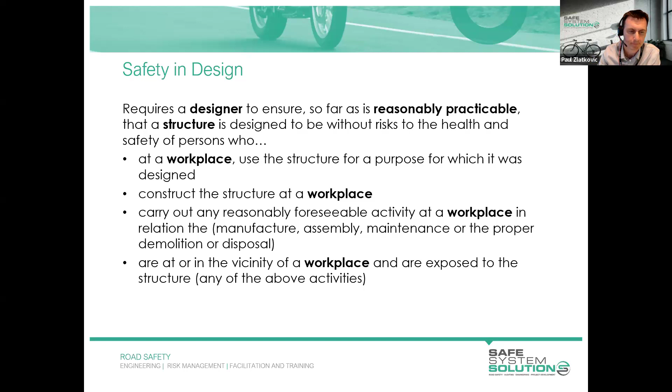Let's dive into a quiz. Now, I understand that safety in design may not be everyone's idea of an excitement-filled topic. So as I said earlier, there are prizes to be won, and our aim is to keep you thinking and involved throughout the session. We're going to run a series of polls, and ask you to contribute some answers in the chat as well. We're going to dive into the meaning of those terms: workplace, structure, designer, and reasonably practicable.

No, actually a workplace is a place where work is carried out for a business or undertaking, and includes any place a worker goes or is likely to be at work. So under the Work Health and Safety Act, a workplace covers many places beyond a traditional view of a workplace.

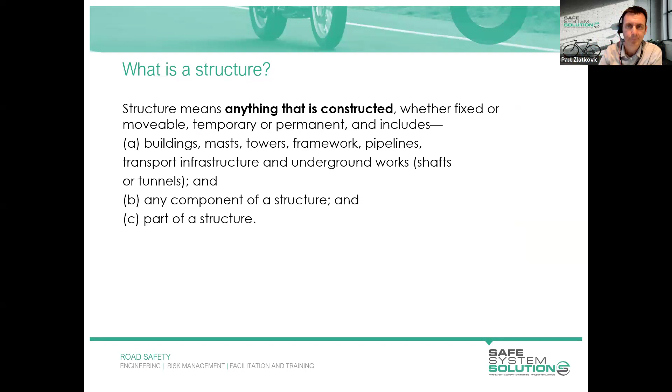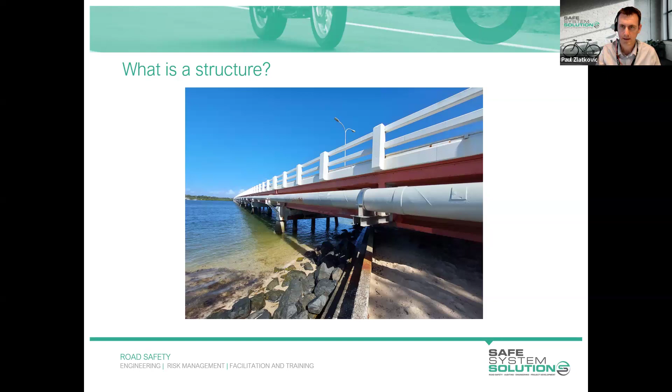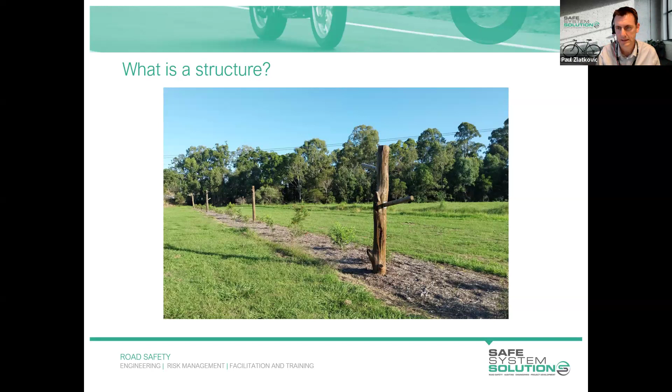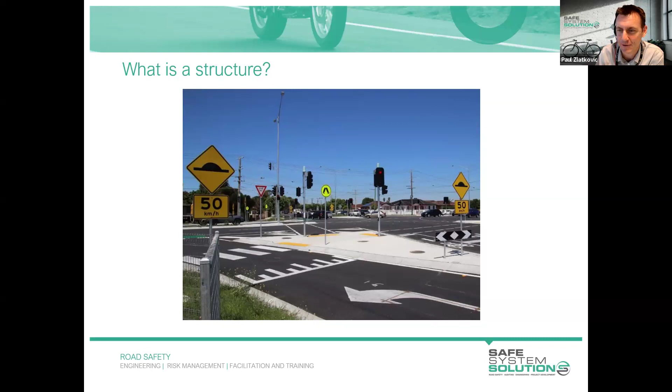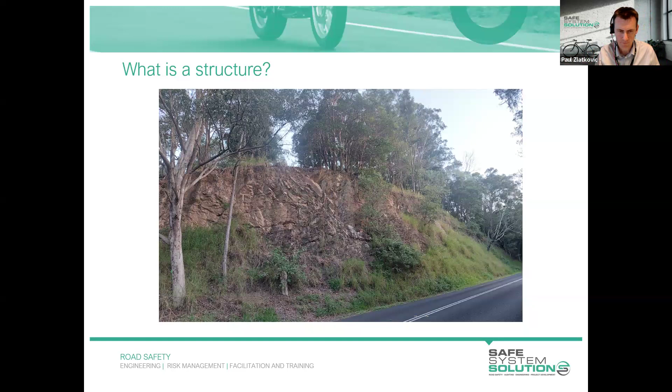Wonderful, all right, so we'll put the polls away for a while. We've got a few more coming though. Oh, actually, sorry, what am I talking about? Got carried away there, nearly forgot one, Paul. Yes, I've got lots of structures. Just ironing out the kinks, aren't we? I can't remember how many I put in, but I got carried away.

All right, I promise that this is the last one around structures. We're almost there.

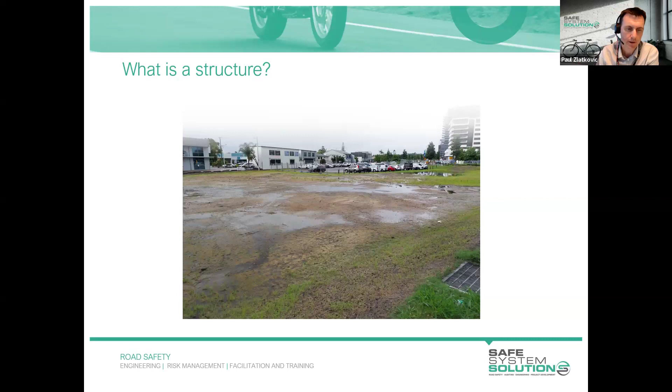Fantastic. Okay, all right, so we're moving on from structures. Now we're going to focus on designers.

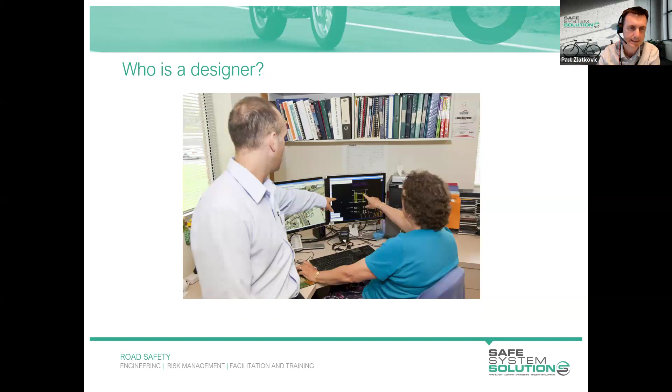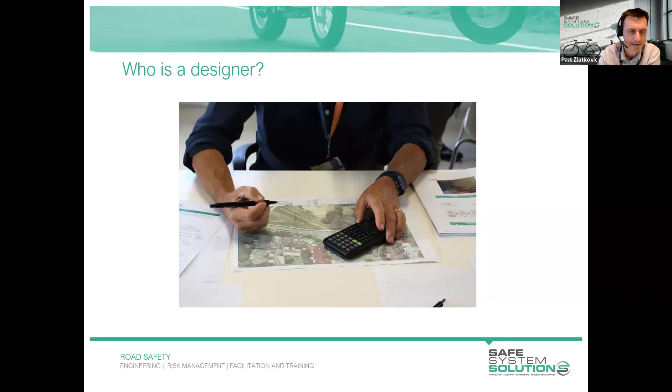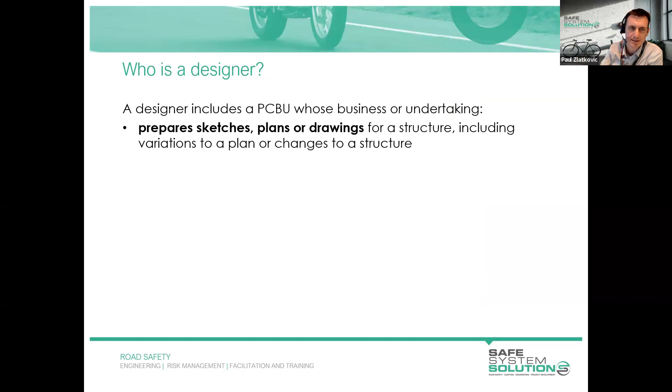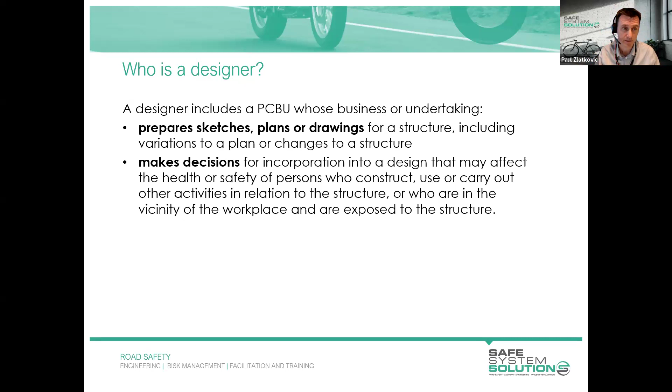So who is a designer? Is it just the people working in that photo there using AutoCAD or 12D? Are those the designers? Someone that uses a calculator perhaps and marks up plans, classic designer behaviour? Well, yes, those are designers, but no - the designer is anyone that includes anyone that prepares sketches or plans or drawings for a structure, including variations to a plan, and also includes people that make decisions for incorporation into a design that may affect the health and safety of persons who construct the structure, or work around the structure, or in the vicinity of the workplace. Those are also designers. So that's an important point there - it's not only what we all know designers are, preparing sketches and plans and drawings, but also those people that make decisions that can affect a design.

So I don't have a poll here, but I thought in the chat we could write the names of roles that you might think of that are at council that would fit that definition of a designer.

John's pretty quick there. So councillors, Brent - civil designer, spot on Brenton. AutoCAD draftsperson, managers, yeah Hans. Project manager, indeed. PRO - is that a project responsible officer, architect? Yep, that's it. I was just going to say that, yep. I think I've heard that before. Engineer, spot on Aaron. Site supervisor, yeah that's a good one. Graduate designer, yep, designer, yep - I'm sure graduates make decisions, that's for sure. Lighting engineer, senior designer, a master planner. Well done, yep Simon, spot on.

So all those are designers under the definition, or could be designers under the definition in the Work Health and Safety Act. So yeah, John threw up councillors there, and I'm not sure of the processes you have at council, but I do suspect that councils can influence and make decisions around designs. So in that context, they would be a designer under the Work Health and Safety Act.

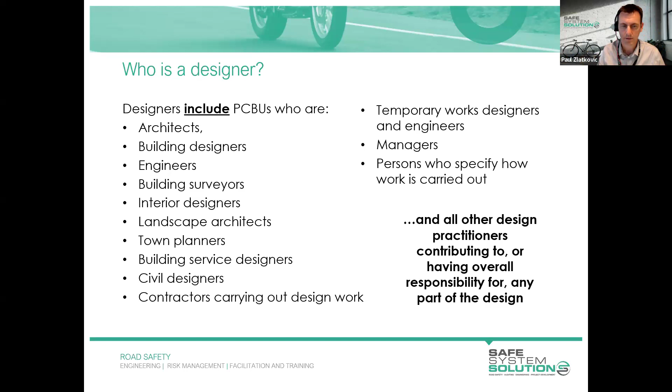Also, I'll just jump onto the next slide. There's a few key points to take away from this one. So anyone that makes variations to a plan or changes to a structure is a designer. So if a design is prepared and it goes out to the field and there are some changes made in the field, and the original designer hasn't been consulted with, then the person that's making that change or variation to a structure then becomes a designer.

So that's quite important to note. Anyone that specifies how work is carried out is also a designer. So you may not be involved in plan preparation or making decisions around the design itself, but if you prepare a specification, a project specific specification about how some work is going to be carried out, well, you're a designer under the Work Health and Safety Act. And contractors also carrying out design work are designers. So it doesn't matter what you call yourself - you might call yourself a contractor, but if you are doing design work, then you are also under the Work Health and Safety Act.

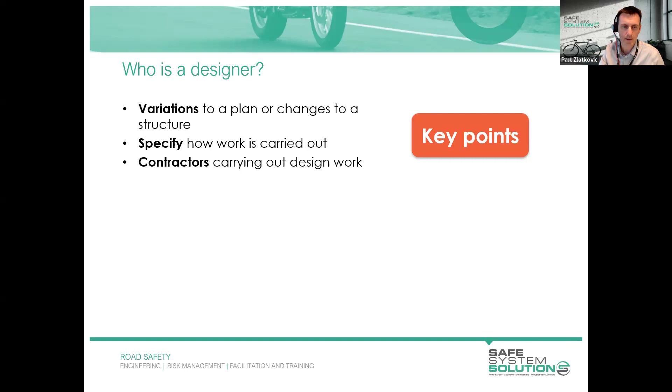Okay, so we've covered designer, we covered structure, we covered workplace. So the last term I want to delve into is asking ourselves what is reasonably practical. Remember that safety in design requires a designer to ensure, so far as is reasonably practical, that a structure is designed to be without risk to health and safety.

So you can see the guy on the screen now. Is that a reasonably practical way to protect yourself from hazards? If it works - maybe if you're posting yourself somewhere, that could be the go.

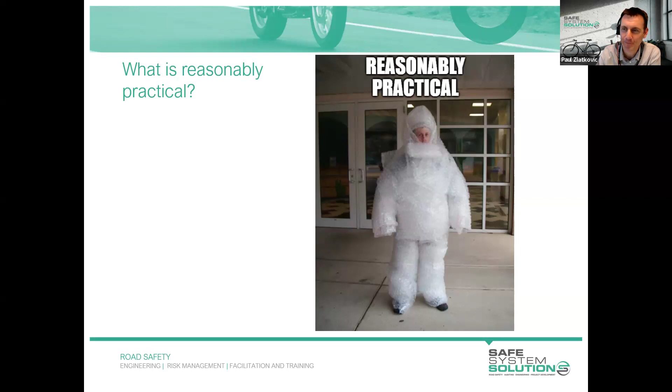I might just jump in there. We've got a question that's come in. Paul, is a member of the public a designer if they put a sign or similar in the corridor? Great question, Andrew. I think we'll shoot Andrew a prize. What do you think?

I would say no, because unless they've been asked to put the sign there, they haven't been authorized as a designer.

Yeah, I'd agree. I assume that there's some authorization required to throw things into a road corridor. A vandal - yeah, that could be a description, Jamie. Prize for Jamie for making us laugh. I'm not sure of the exact process, but I'm assuming, Marco, that no one can just go out there and throw a sign into a road corridor without having some sort of approval or authorization. It does happen, but I think there's an approval process to put signs, because it depends if it's one of those variable message signs, and the amount of light and stuff like that.

Is it constructed, I guess, is the other question. Yes, I think something that has to be fixed to the ground or hammered in, maybe a stake, is something that is constructed.

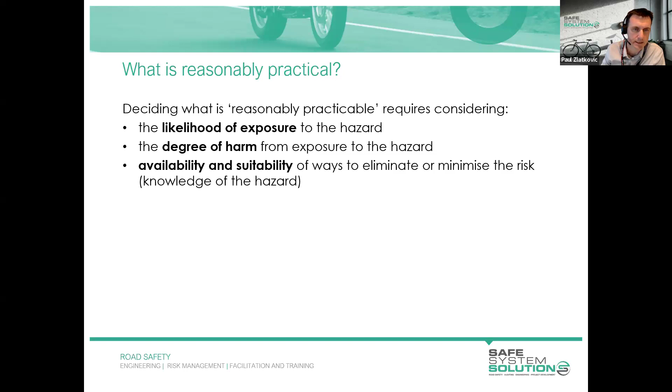The next one is availability and suitability of ways to eliminate or minimise the risk - is there a means to do that, I guess is the question. And the cost associated with eliminating or minimising the risk, including whether the cost is grossly disproportionate to the risk. That term, grossly disproportionate, will have a different meaning for everyone, so there's certainly some subjectivity around what is reasonably practical.

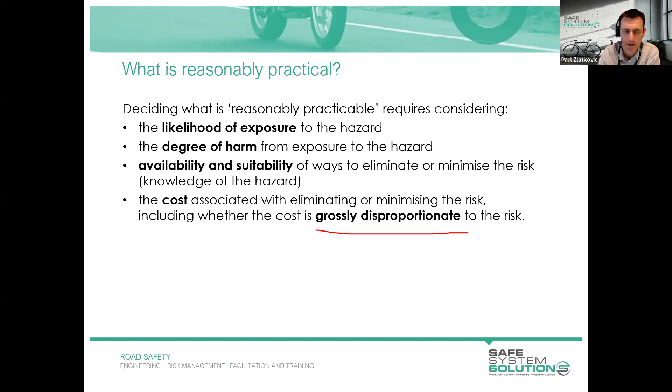So we're going to move into another exercise just to get us thinking about what is reasonably practical. And surprise, surprise, there's going to be some polls involved, so we'll get you thinking - caps on.

So in this exercise I want you to think about a hazard. The hazard is working at a height, and the reason you're at height is that you're replacing a luminaire on one of those light poles in the image, and the risk is then falling from a height whilst you're replacing the luminaire. So we're going to think about what are some reasonably practical ways to eliminate this risk.

So Marissa, you fired up the poll there - some options for you. I want you to respond with what you think is reasonably practical to eliminate the risk. The first one is just don't worry about road lighting, we don't need it, that will eliminate the risk. Use hinge poles that can be maintained from ground level. Specify a long life luminaire that costs a little more. Design a council drone to go and just change luminaires everywhere.

There's no drone department at council, is there, Marco? Our surveyors have a drone, but for survey purposes only - I don't think it can change the lights at the moment. Not yet, okay, because if you did that might change the answer to that question. So we've got, we're almost there on responses.

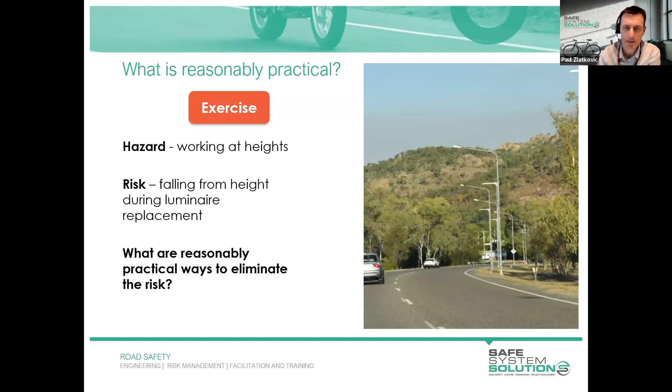Design a drone to change the luminaire. So there's perhaps a few handy drone pilots among you that thought that could be reasonably practical. Based on my knowledge, probably not at the moment, but the way things are going, that could change. Well done, I think we're all in broad agreement there. So we'll jump on to the next one.

Thanks Paul. We also had a comment that you could install the lights further away from the road corridors so they're safer and easier to access without work crews being on or close to the live road. Yeah, spot on - that's likely a different risk we're talking about there, maybe the live traffic risk of workers on the road being hit by live traffic. By moving them further away, you give them more space, maybe with a longer outreach arm or something like that. I'm not a lighting designer, so someone can correct me if I'm talking rubbish.

Alright, let's look at the next example. This is one of the design projects we'll consider in the design exercise tomorrow, or one of the small groups will. So the hazard is a coastal area working near water, subject to tidal influences - there'll be rise and fall, and the risk is a worker at the bottom of the cliffs drowning when they're working on this cliff stabilisation project. So think about ways that are reasonably practical to eliminate or minimise the risk.

So we can fire up the next poll. There it is - you've got 4 choices. Is working only during low tide periods reasonably practical? That's at Scarborough, by the way, so some may know the tide times and heights there. Construct a temporary cofferdam in Moreton Bay for the limits of the project - you can sort of see the project area there. Use a lookout to warn for big waves coming in from Moreton Bay. Undertake works from the top of the cliff.

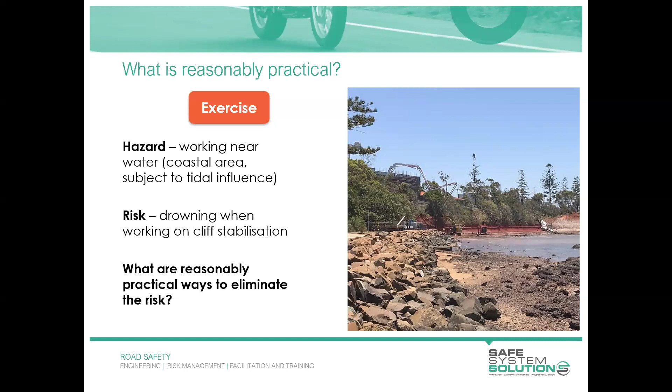So does that then become reasonable? Yep. Agreed. I hadn't thought of that, Mark. There's certainly be a few approvals required. So that would factor into the cost equation. So if your cofferdam can become part of the solution.

Yeah, Peter. Yeah, out of my depth talking about coastal engineering, but that's certainly a consideration to try and think about exactly what safety in design sort of intended to do. Is there a solution there that we can use to keep people safe while the work has been undertaken that becomes part of the ultimate solution? So lots of possibilities.

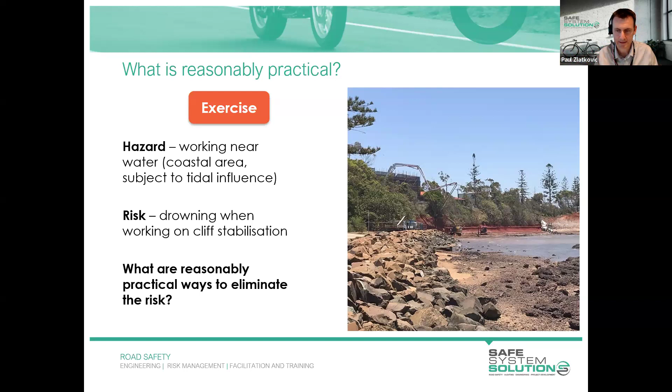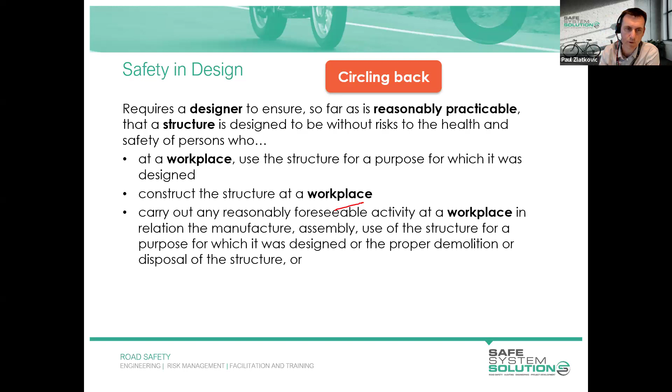Circling back to safety in design, the definition we introduced at the start: this requires a designer to ensure, as far as is reasonably practical, that a structure is designed to be without risk to the health and safety of persons who at a workplace use the structure for the purpose for which it was designed, construct the structure at a workplace, carry out any reasonably foreseeable activity at the workplace, and lastly, are exposed to any activity at the workplace.

We'll have a break in a second, and I just wanted to reinforce what safety in design is. We've gone through all those quite important terms. After the break, we'll move on and talk about other safety in design considerations. If you have any questions, just pop them into the chat and I can answer them after the break.

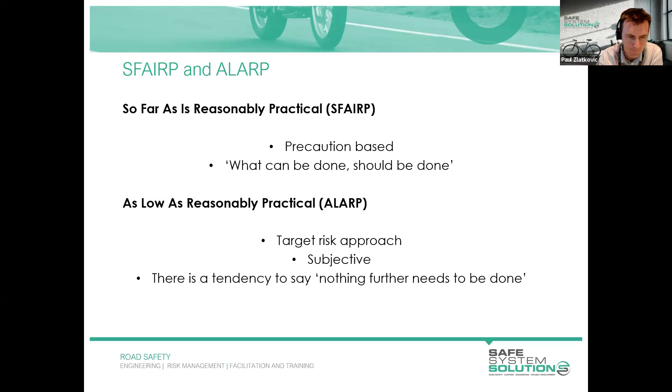Excellent, okay, thanks for participating in that poll. So we'll move on to the next one, and it's around knowledge and capability. Design projects are often, I think, too complex to be fully understood by one person. In my experience, there's been a move to specialisation in technical and engineering disciplines for a range of reasons, and it's very unlikely these days that one person will have a full and detailed understanding of all parts of a design project.

There can be some exceptions, maybe really small and simple projects will be straightforward, but many of the projects undertaken by council will need the knowledge and capability of many disciplines. So in practice, when we're thinking about safety in design with this knowledge and capability consideration in mind, it means that safety in design is not just a job that can be completed by one person, it requires contributions from a range of people.

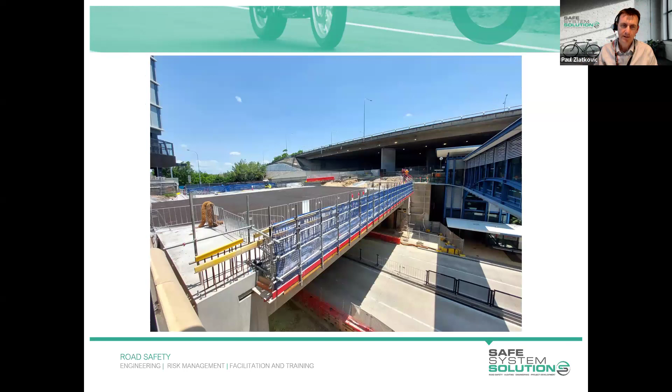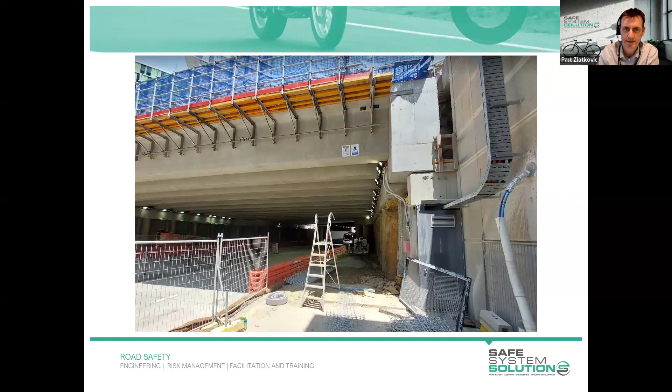So this is a fairly complex project happening in Brisbane, the Brisbane Metro. It was a busway station, I guess it becomes a metro station, I'm not really sure, but you can see it's quite a complex project, including bridge structures, temporary works, electrical, live traffic, and civil works. That's a pretty extreme example, but it shows the potential complexity of some projects that exist these days.

As I said before, design projects are often too complex to be understood by one person, which means we need people with specific skills and experience included in the safety in design team, and they need to be consulted during the process to fill any knowledge gaps.

Recently, I was part of a safety in design assessment that included 25 participants because of the complexity and scale of the project involved. Over the years I've been involved in safety in design assessments ranging anywhere from 3 or 4 people right up to 25, and it will certainly vary from project to project.

I've got a very incomplete list of skill areas there, particularly in relation to some of the works and projects that council will do. So I want you to jump into the chat now and identify any other skill areas that I've missed, skill areas that might be needed on projects that council completes.

Hans got urban planning. I did have urban design, so I wasn't far off, but I don't think I've got... yeah, maybe I missed out planning there. So it is an incomplete list.

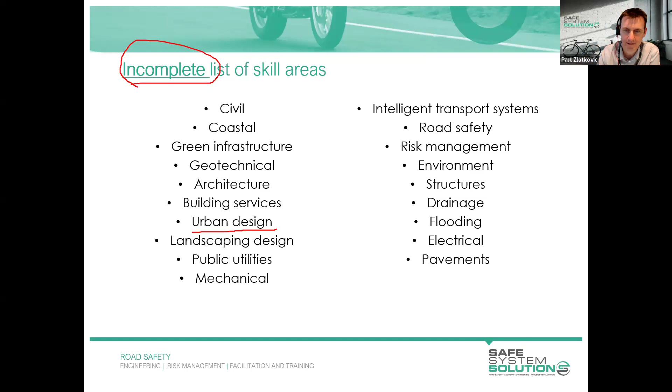How am I going with prizes, Marissa? I've been a bit slack, haven't I? We can probably dish out a few more, I've got a few more in my bag. Excellent.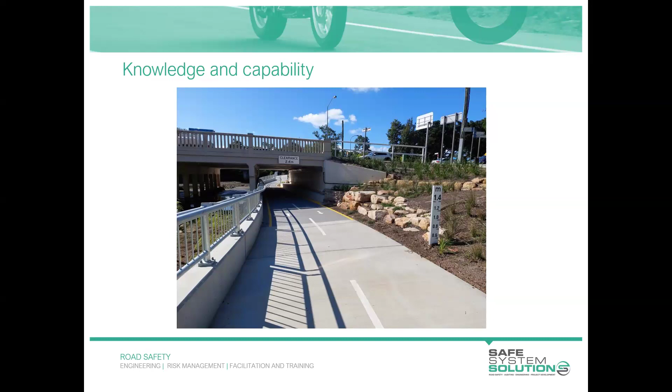Ben with hydrology, transport planning, Nadia, structural engineering, of course, even though the structure's already there, there'll be an interaction between the path and the structure. Accepted, urban planning. Traffic engineering, I guess, yep, around the path design, conflicts. Flood engineer, yep. Landscape design, yeah, good one, Aaron.

Stakeholder engagement, yeah. Metal fabricator, yep, so there's some good points there. We'll talk about metal fabricator a little bit later in a few slides' time. I'm probably thinking more around some of the design skills or knowledge areas, but we will touch on contractors and the roles of contractors and fabricators and manufacturers in a few slides' time. But great that you're already thinking about that. Geotech engineer, yep, perfect, got the hang of that.

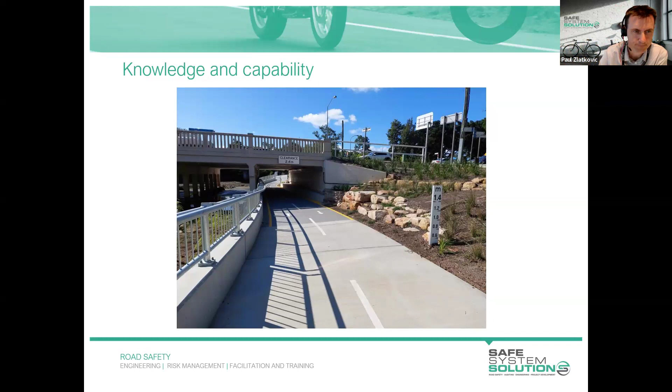So a good skill area to be involved. Service providers, Sheldon, yes. Civil designers, almost forgot about them, but they're very important. Daniel, utilities, Sheldon, yeah.

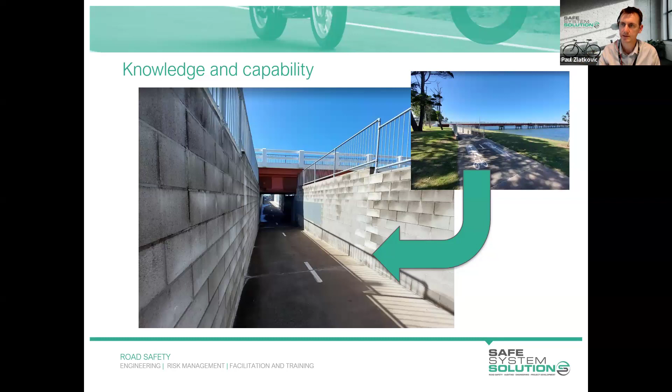Okay, hand in hand with the knowledge and capability of designers, it's also necessary to draw on the experience, the knowledge and experience of others. And when we were running through those other examples just then, many of you were identifying fabricators or contractors that would need to be involved, and that's certainly the case.

So yeah, it's important to draw on their experience. We've got manufacturers of products, suppliers of products, workers themselves. Consultation with workers is a legal requirement in the Work Health and Safety Act, and it's significantly important. Getting those workers involved early can allow for the identification of risks earlier in a project, and can also give you more options to eliminate or minimise the risks and reduce costs. So I think that's super important.

Depending on your background and your experience in maintenance and construction - I know that my design experience is just that, it's design experience. I don't have any experience out in the field, so I don't know how everything is constructed and how all those processes take place. So if I were designing something, as well as it being a legal requirement, I would be involving construction workers and people actually experienced in building stuff in a safety in design assessment that I was running.

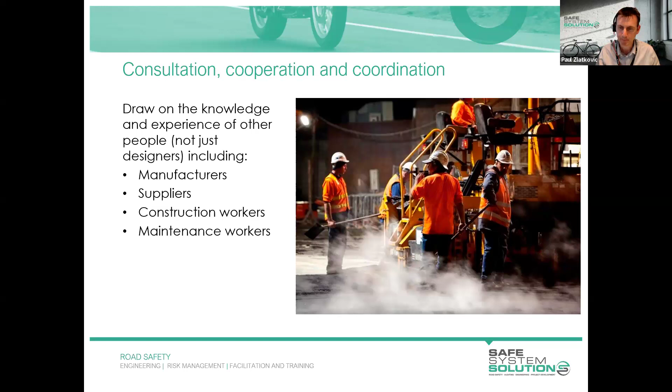But aside from that, you may not know too much about the product. So you would consider involving the supplier or product rep in the design process, and potentially also as part of your safety in design workshop, depending on the type of product you were considering using as part of your design.

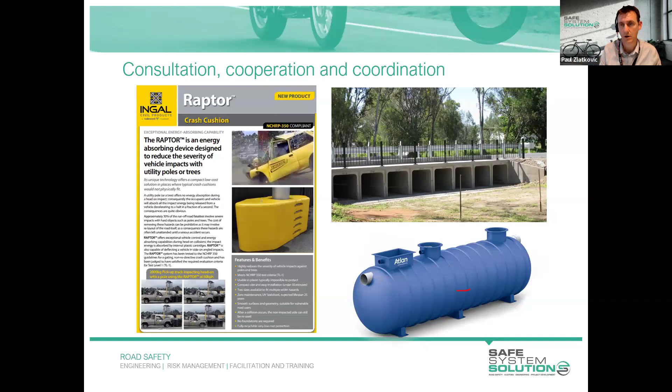Okay, so in what stages must safety in design be considered? The not too surprising answer is that we need to consider it in all stages of a design process - that includes planning, concept and detailed design. I understand that those are your three stages of design at Moreton Bay.

And the earlier stages of a design - I know you've heard this many times - provide the greatest ability to influence the outcome of a design and avoid rework and additional time and cost. The maturity of design can sometimes limit the level of assessment that you may be able to undertake in the early stages of concept design or planning. We'll talk about that in more detail in module 2 when we run through the process and a design exercise.

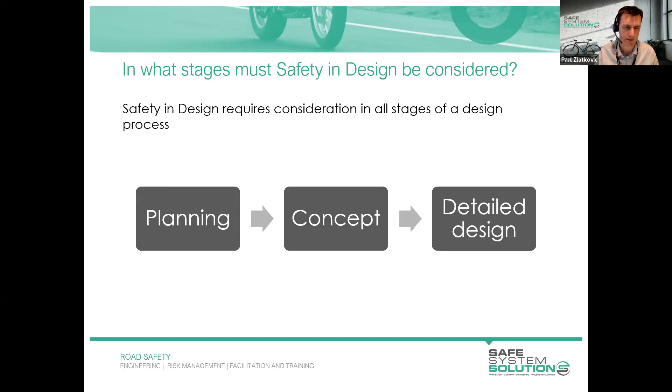So what about some of those other design considerations that we must take into account when we design something? There's a range of policies, plans, standards, and guidelines that need to be considered when forming a design project. Standards and guidelines will often address safety, but applying a guideline or standard doesn't necessarily mean you're going to adequately control risks in a workplace.

Similar to the principles of a road safety audit, just because you have a fully compliant design in accordance with Austroads and Australian standards doesn't necessarily mean you'll have a perfectly safe, risk-free outcome. It's the same with safety in design and workplace risk—applying everything in accordance with Australian standards doesn't necessarily mean you've adequately addressed workplace risk. This certainly might be the case when you have unusual or atypical structures.

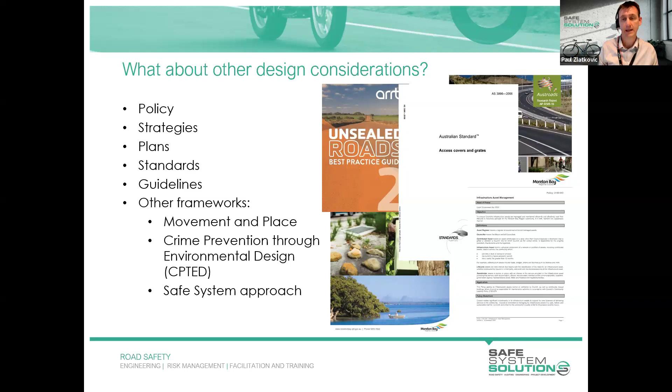So risk management is another consideration. Safety in design aims to eliminate risks to the health and safety of persons in a workplace, and if that's not reasonably practicable, we want to minimize those risks as far as we can. Risk management is a proactive process that allows you to respond to change and facilitate continuous improvement—that's how we use a risk management approach to achieve the aims of safety in design.

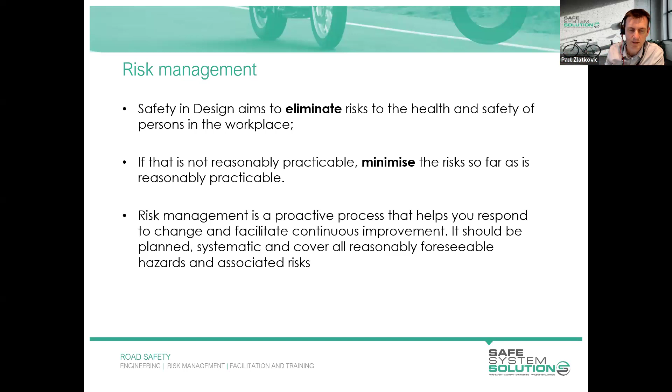We get into risk assessment more in module 2, but the risk assessment approach for Safety in Design is typically the same approach used for whole-of-project risks. It's important that we keep these distinct though—Safety in Design risk management and whole-of-project risks have different objectives. The clear objective of Safety in Design is to eliminate or minimize risks to those in a workplace, while a whole-of-project risk assessment can be driven by other objectives.

Often there's a question in a project around whether we can combine the project risk workshop with the Safety in Design risk workshop, just to get it all done quickly and efficiently. That often can lead to confusion and a muddling of the risks and objectives of each of these risk management processes. So it's important that there is a division between Safety in Design risk management and other risk management carried out as part of a project.

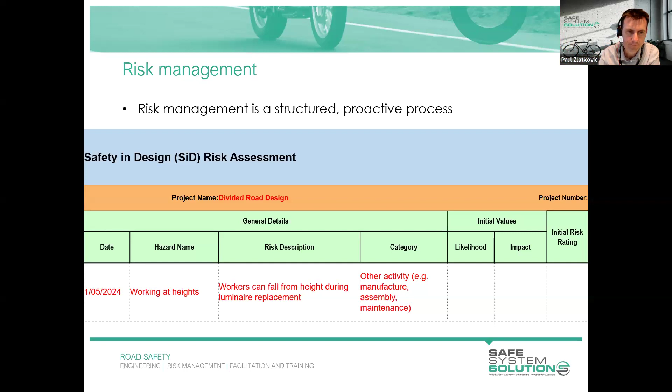We know a lot of hazards and their associated risks quite well because we tend to do the same projects regularly. If a risk and its control is known, you can implement those controls without undertaking a further additional risk assessment. That's one of the key benefits of the Safety in Design process—it allows focus and assessment on unusual projects: a constrained site, new processes required for a project, or any new materials or products being used.

So we know a lot of risks that we encounter as part of our project design. We still need to consider those, but I think the real value in a Safety in Design process is to explore some of those more unusual or atypical aspects of a design project, and really delve into those to make sure that risks associated with any of those unusual aspects are understood and are eliminated or minimized.

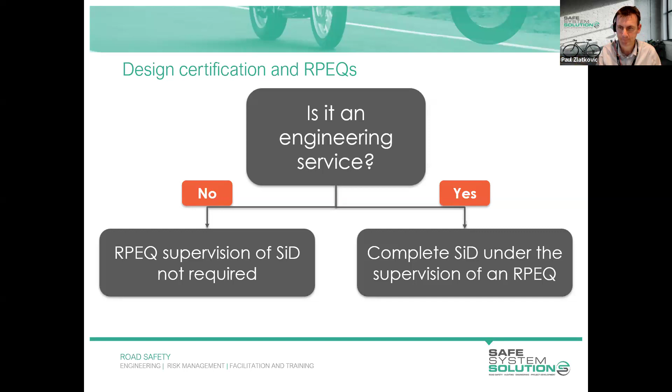Okay, well, that was the last other consideration that I wanted to touch on. So just to review what we covered today, we've made great time. I probably do fear I've got a lot of content to come in Module 2. So thank you for being the first group and the guinea pigs as far as my timing and my content goes, but I appreciate your participation and your questions as well.

So in Module 1, we've covered the key definitions around what Safety in Design is. We've covered a workplace, a structure, a designer, and we've defined what is reasonably practicable. And we've talked about those other considerations, so SFAIRP or ALARP, excuse me - reached the limit of my talking as well - knowledge and capability, consultation, cooperation and coordination.

We talked about those other design considerations, so there's other guidelines and policies and standards that we need to apply and we need to balance with Safety in Design. We've talked about the project life cycle, the design life cycle, and getting our Safety in Design process underway as early as possible, because that allows us the best opportunity to affect the Safety in Design outcomes in the design.